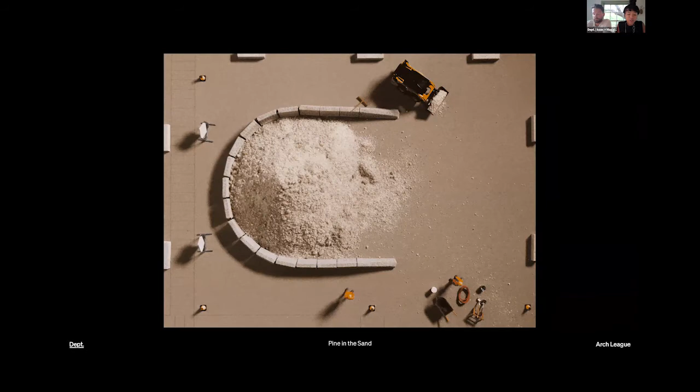This first project is called Pine in the Sand. It's a living installation located at the Wallach Garden in Cambridge, Massachusetts. Through this installation, we were interested in exploring how people would interact with and shape a landscape over time, and calling attention to the labor of maintenance and care, as well as the environmental processes of degradation, erosion, and change. Like the title, the physical contents of this installation are quite simple. A pitch pine is planted atop a 12-foot mound of sand, and concrete jersey barriers partially contain this mound in a U-shaped wall. There are also recycled granite benches opposite the mound for visitors to rest and reflect.

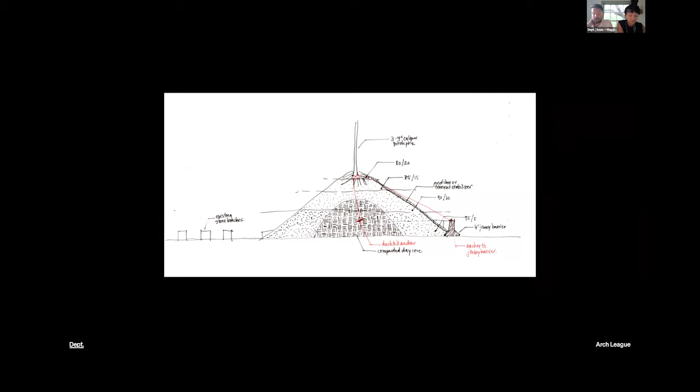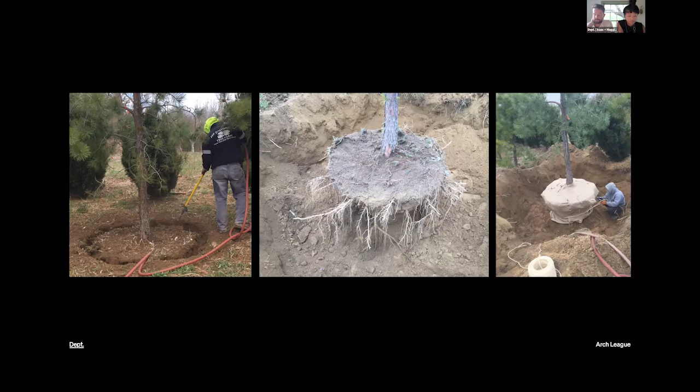Though simple on the outside, the installation depends on what cannot be easily seen. From the calibrated soil mixes that balance nutrient content of the tree and structural stability of the pile, to a locally sourced pitch pine that was extracted from the ground through a process called air spading to preserve the most roots possible, to testing and modeling the exact extent of erosion given different sand and compost combinations. Over time, rain, wind, and snow alter the appearance of the tree and the mound.

Winter turns the pile into a small snow cap, and the color of the sand changes depending on how recently it has rained. Even small mammals have moved in.

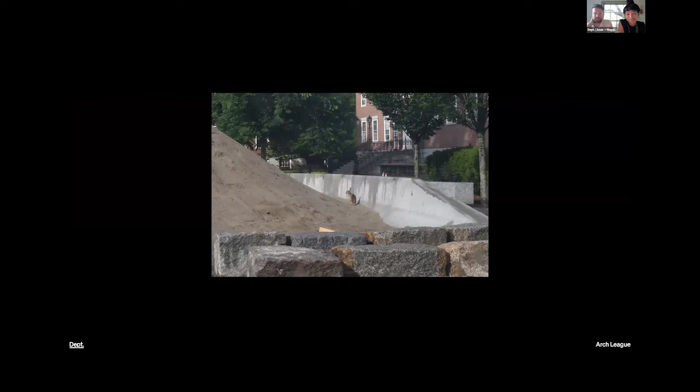The installation invites visitors to interact using brooms, rakes, or whatever they may please. They are simply asked to please take care. Visitors engage in a variety of actions, relationships, and etiquettes that bring the pile to life, from gently raking and upkeep, to rambunctious running and playing, to writing fleeting messages, and to quiet reflection.

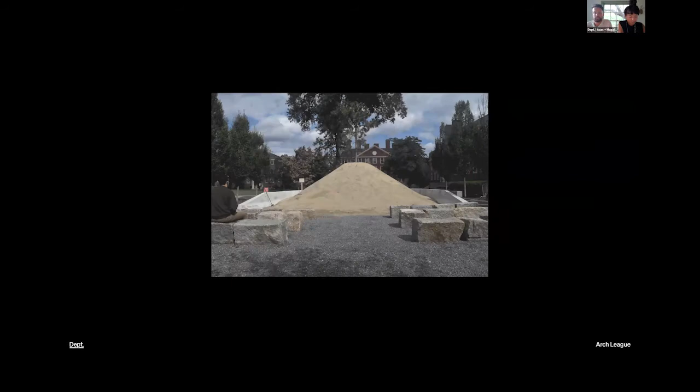The deliberately mundane elements of the installation, a tree, some sand, and jersey barriers, come together to create a space that is transformed by the social and cultural dimensions of maintenance, care, and upkeep. The pile of sand becomes a background to everyday life.

With time, visitors come to see the installation as a barometer for change, registering short-term changes in weather, as well as slower changes in seasons. But more importantly, with patience and steady observation, visitors see the installation as a monument to impermanence, a small pile that manifests the ways in which we contribute to the degradation and care of our environment.

The Good Neighbor Stormwater Park is a half-acre community park in the city of North Miami that transforms a flood-prone vacant property into a stormwater infrastructure landscape. The project was designed and built as part of the Van Alen Institute's broader initiative called Keeping Current.

The intent of the project was to reimagine the use of the city's growing number of so-called repetitive loss properties, or properties that are very prone to flooding. The driving concept of our proposal was to create a stormwater retention basin that would both prevent flooding for the surrounding neighbors, as well as provide a community open space.

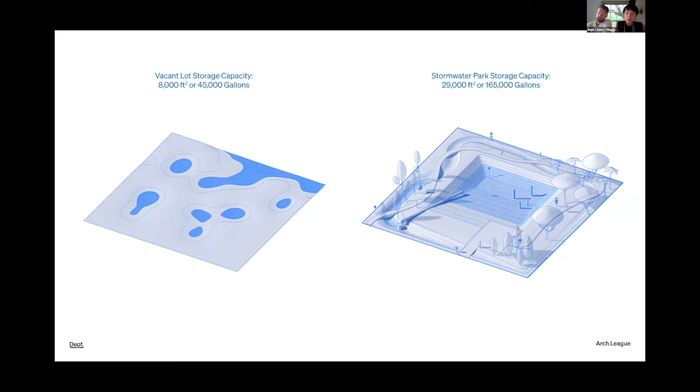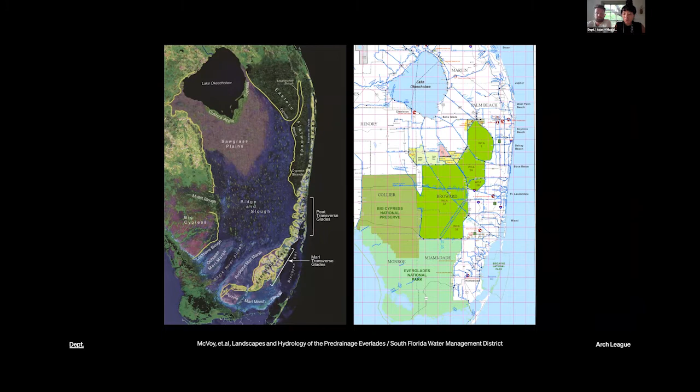Literally on top of that hydrological system, the continuous expansion of impervious surfaces such as roads, parking lots, and building roofs limit stormwater infiltration. And finally, because of the limestone geology of the South Florida region, sea level rise actually elevates the groundwater levels across the area, making flooding worse in low-lying spaces and rendering infrastructure basically outdated.

Before the Good Neighbor Stormwater Park was built, there used to be a house on the vacant lot. It was built in the 70s, and the house flooded so frequently that eventually the city offered to buy out the owner. When the owner accepted the offer, the city demolished the house and the lot lay vacant for approximately two decades.

A simple excavation on the site, which lies several miles west of Biscayne Bay and the Atlantic Ocean, reveals that the water table is only inches below grade, even on dry days.

Communicating the history that Maggie alluded to of the site and its present-day impacts, as seen in the hole, were principles that we baked into the community engagement and into the design of the park itself.

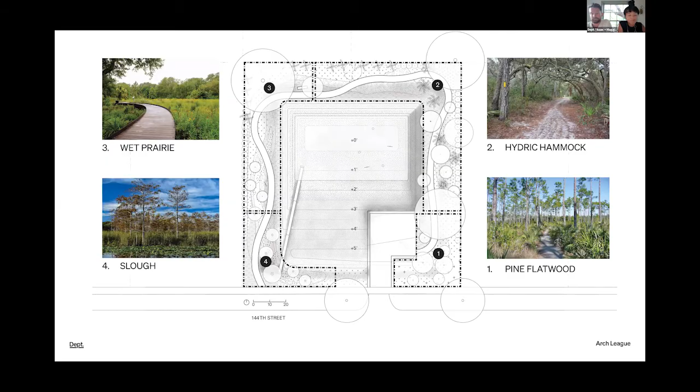In addition, there's interpretive signage about each of these plant communities, neighborhood flood hazards and risks, and the history of the site, providing context and information about the park and its function in the neighborhood.

What makes the Good Neighbor Stormwater Park unique is that it provides multiple benefits in a small footprint. It reduces local flooding, restores habitats and strengthens ecosystems, and finally, it provides a community open space that engages neighbors and residents on flood risk.

The park also serves as a model that can be adapted and replicated for future repetitive loss properties in the vulnerable region of South Florida, which we detailed in the overall vision plan and roadmap for the city of North Miami.

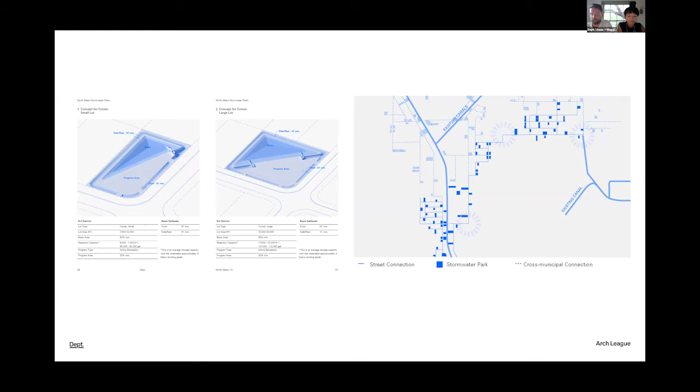In this way, the park offers an alternative form of stormwater infrastructure. Unlike other retention ponds or stormwater pipes, which are either buried or hidden from sight, the Good Neighbor Stormwater Park is a legible landscape for flooding and advocates for a small-scale, community-oriented approach to stormwater and climate adaptation.

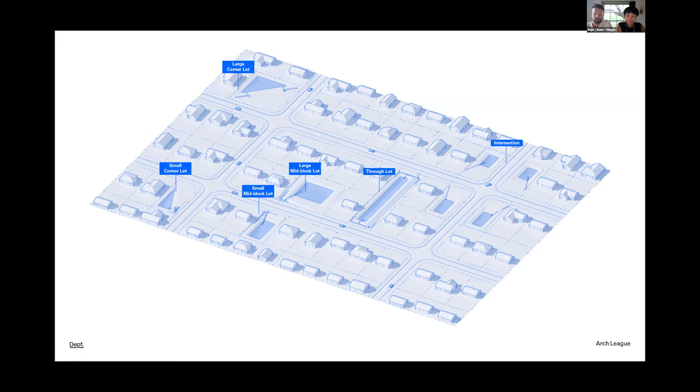The Court is a landscape and courtyard for a small hotel in North Florida that we recently completed. In this project, one of our goals was to transform a heavily compacted parking lot into a coastal scrub garden. In doing so, we worked to persuade our clients to reimagine the relationship between public and private spaces within the hotel and to push their boundaries of typical landscape and maintenance practices.

In this project, we were interested in recreating the region's endemic landscape while also accommodating the programmatic needs of the hotel. Last week, there was a discussion among the panelists about the relationship between the designer or architect and the client.

In this project, in our practice, we have a lot of typical developer, commercial, and institutional clients. But in that work, we are always collaborating with them as well as contractors and others to really demonstrate how our work, in this case landscape, is not mere dressing on top of the ground, but is really a performative, infrastructural, and culturally significant aspect of the project.

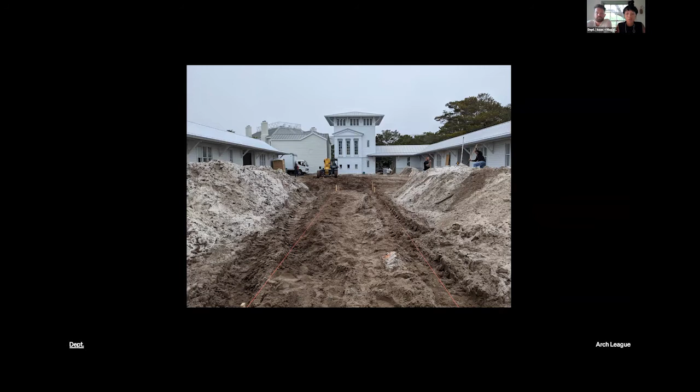Functionally speaking, the client wanted to separate the central courtyard from the private units of the hotel, and they initially suggested that we build a fence or physical partition. For us, rather than creating a sharp division between public and private, we proposed a subtle topography and strategic planting that would provide a more fluid threshold and a lush garden setting for the courtyard.

This topography is specifically modeled after the sand dunes just 500 feet south on the Gulf of Mexico from this site, and composed so that when you're sitting inside the room or laying on the bed, you feel immersed in a subtropical scrub forest, shielded by the palmettos and leaves of the live oaks. But once you stand up and look out the window, you get a glimpse just over the palmettos into the central courtyard.

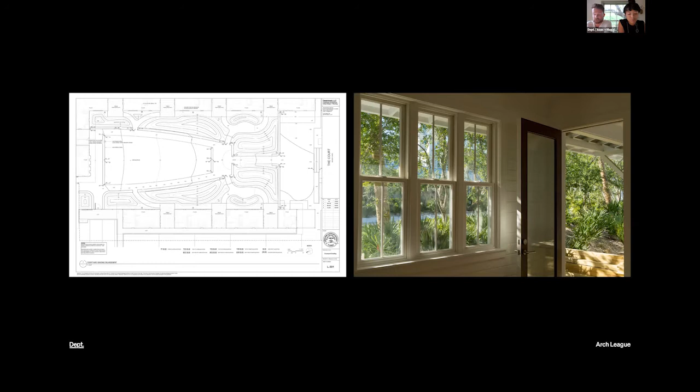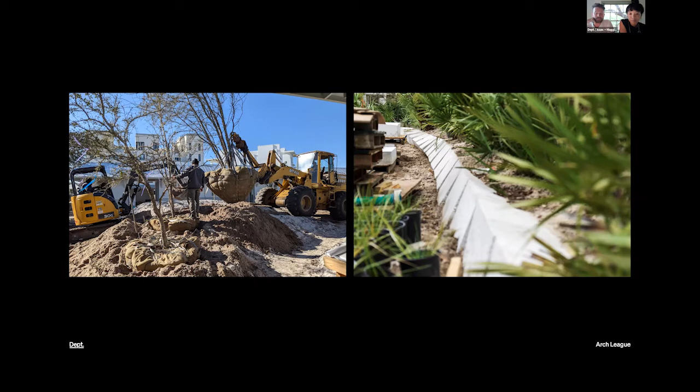In order to execute this concept, we worked with a community of collaborators, from suppliers and installers to groundskeepers and artisans. With regional tree farms, we worked to source wild-grown trees or trees that were otherwise undesirable, either because they were bent or curved or multi-stemmed. We worked with a local concrete artisan to refine and recreate a tabby concrete mixing method using shells and lime that you see on the right.

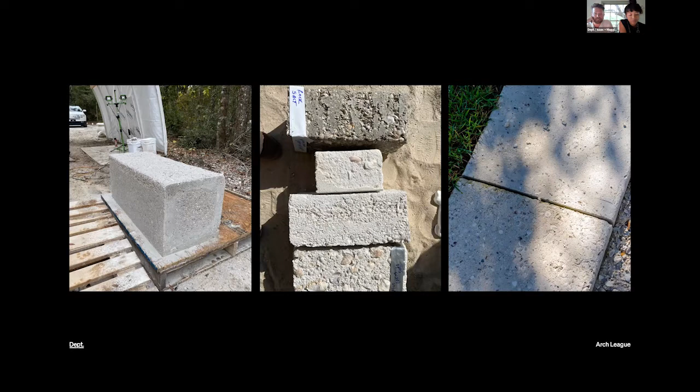Finally, we conducted on-site workshops with the client's landscape maintenance team and assembled a maintenance guide that established seasonal and long-term pruning and upkeep guidelines for the groundskeepers to work with as the landscape matures, evolves, and grows into its form over time.

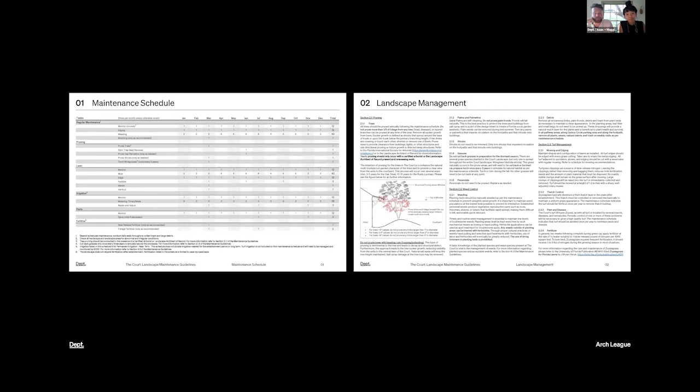Ultimately, the Court is an example of a project where we tried to push the boundaries of our clients' initial expectations and programming needs. In doing so, we aim to help our clients understand the potential of landscape to create a sense of place and cultural identity, and also, through collaborations, develop new methods of construction and making within a local economy.

This last project is an in-progress installation called Prairie Plots that critiques the classic American lawn and explores lawn alternatives. With literal roots in English landscape design and garden cities, the lawn is a symbol of our insatiable desire to control nature. Lawn care, however, has damaging effects, from water-intensive irrigation systems to harmful pesticides to the noxious emissions that lawnmowers and other lawn care tools create.

As a response to this context, and focusing on Houston's historic ecology specifically, Prairie Plots transforms a portion of Rice University's extensively maintained lawn into a vibrant coastal prairie.

So this ongoing installation is tailored around the tools that Rice Grounds already uses, specifically a 60-inch zero-turn mower. The plan is based on a simple grid of planting beds shaped by said mower. We're working with the Rice groundskeeping team to develop a reduced alternative mowing schedule that reduces both emissions and labor.

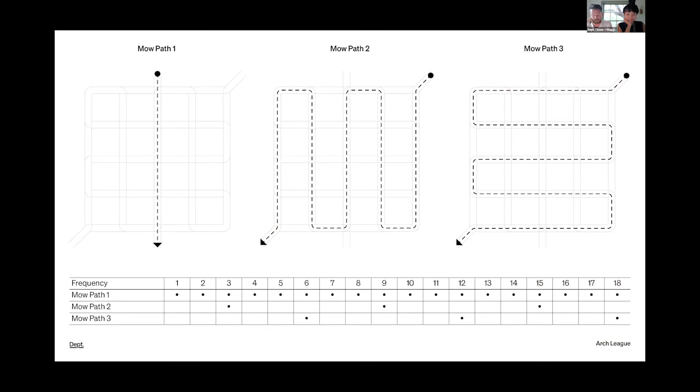The resulting landscape is a prairie garden that allows visitors to envision an alternative to the ubiquitous and homogeneous green lawn.

Prairie Plots, in its essence, is a performative landscape that improves soil health and groundwater infiltration. The Coastal Prairie Conservancy, a regional nonprofit in Houston, estimates that 1 acre of coastal prairie, with its extensive root system, can store up to 400,000 gallons of water. This would significantly mitigate urban flooding, which is a regular nuisance in Houston.

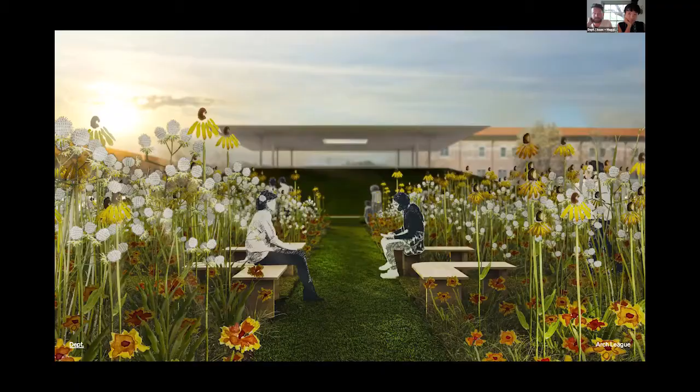So while the installation at Rice is quite small, the potential territory for change is vast. As a living and growing installation, Prairie Plots presents an alternative for the city's sprawling landscape of suburban lawns.

Finally, before we wrap up, we wanted to build off of our Prairie Plots project for this next project called Remnant Nursery, our installation for the Arch League Prize. We worked with photographer Jake Eshelman to document the process. This project proposes a model of collectivity and exchange in the form of a temporary nursery.

In the Houston metropolitan area, rare vestiges of the region's once vast Gulf Coast prairie remain. While protecting and conserving these landscapes is important and critical to conservationists and preservationists, Remnant Nursery instead addresses the reality of rapid urbanization and proposes a messier way of understanding urban ecology.

Through the installation, we rescued plants from a threatened prairie on the edge of the city that was slated for development into a gas station and parking lot, and instead distributed them to Houston's residents. The Remnant Nursery invited community members to facilitate a process of plant migration, where they can extend the life of these unique species within their own spaces, in gardens, right-of-ways, or other urban landscapes.

So we'll leave it there, but you can check out the full installation on the Arch League website.

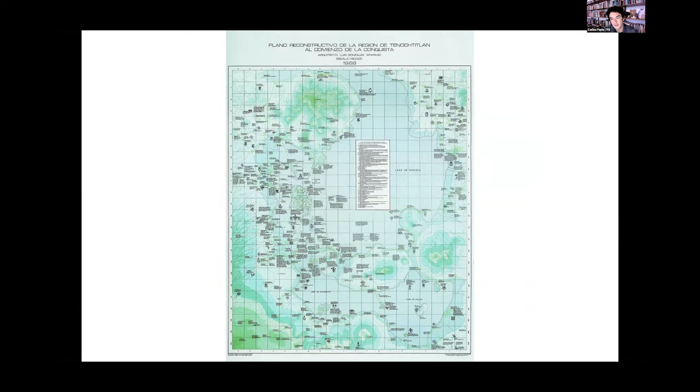Mexico City, Tenochtitlan, 500 years ago was a large system of lakes, islands, and stone paths crossing the waters. The city we came from, after centuries of ecocide, preserves the traces of the ancient city. This is like a trace, you can see both cities in one.

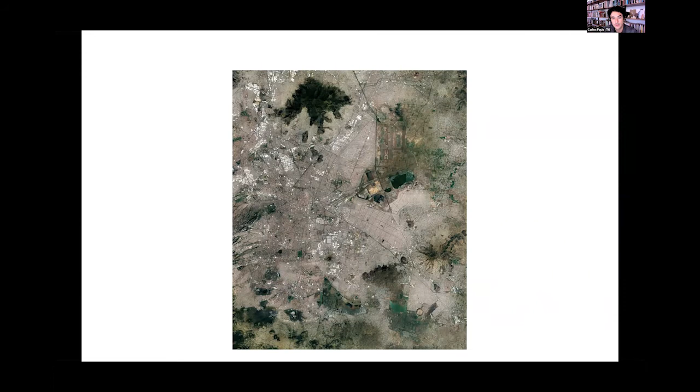We truly believe that the solution to the current environmental and social crisis has to come from the core, from the inside. Of course, fleeing elsewhere not only does not solve the problem, but perhaps increases it.

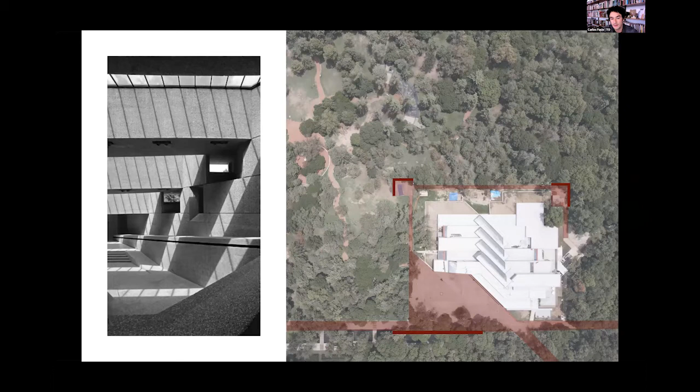So this is the Tamayo Museum. It's an emblematic work, an incredible piece by Abraham Zabludovsky and Teodoro González de León. Here in red, you can see the original exteriors.

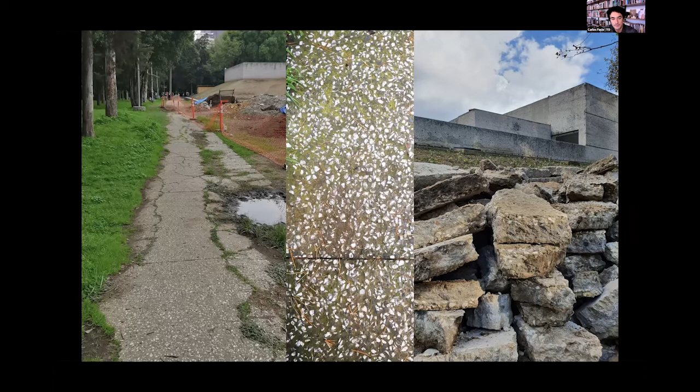And when they invited us for the contest, this was the state of the floors, and they were doing work to remake them. As the budget was very, very small, like $5,000, we thought a strategy could be to float the original floor, to convert the memory into a vegetal pergola, paying only for labor.

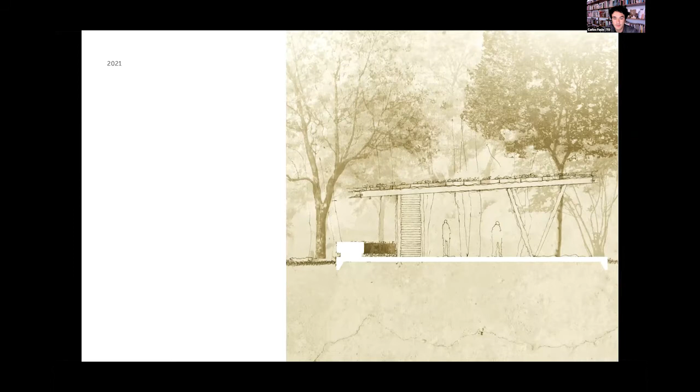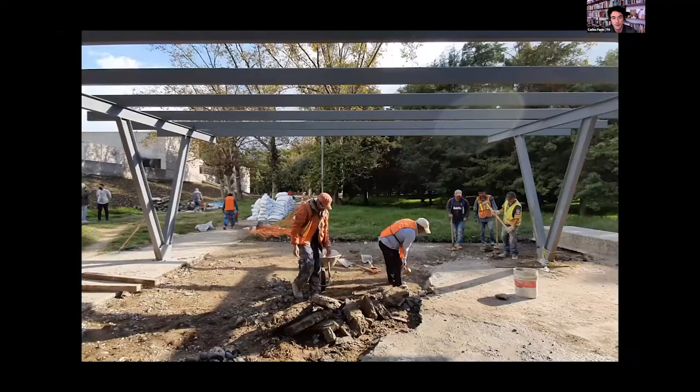This is a sketch made by Hugo Sanchez, a friend of ours and a great landscape designer. Over the years, the idea was that the plants could be a testimony to the passage of time. And the work started.

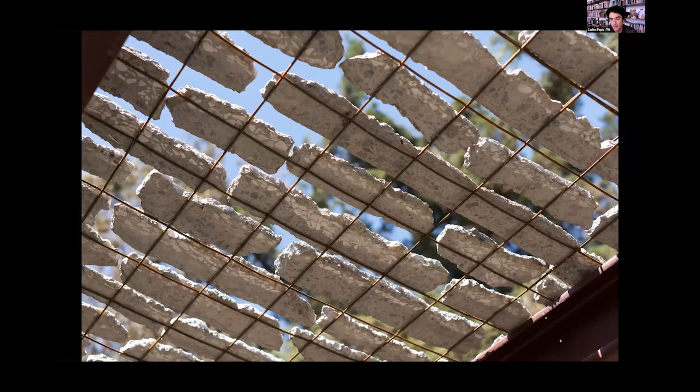We sliced the rubble, turning it into slabs. This piece of stone became like tiles in a pergola, and some parts became planters for soil and vegetation. Here you can see the original marble stones and a material that was meant to be rubbish in some dump, converted into a temporary testimony of the museum's memory.

In the end, we really hope that they feel pity for the plants and never move the pavilion. Fingers crossed.

To delve further into this reflection about the crisis of Mexico City, as you can see, the green areas of the city are disappearing around the city, and we have to turn inwards. So how can we recycle our own architecture?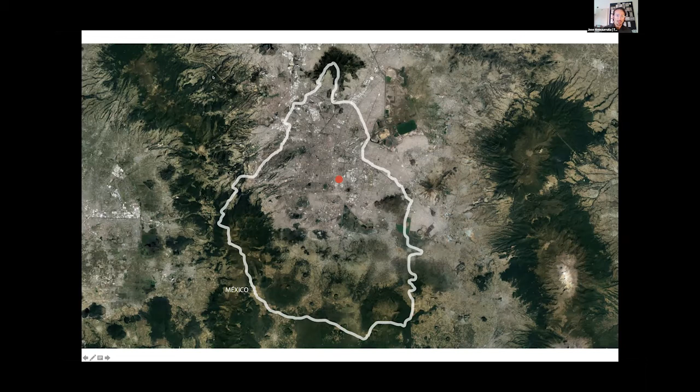This plot is in Iztapalapa, an area of town that received a lot of the rubble from the 1985 earthquake. From that rubble, many parts of Iztapalapa were not proper for building houses, but eventually the community organized itself to regulate the land and improve the quality of the soil in order to build.

Here it was a non-governmental organization that organized people to improve the quality of the soil and regulate the land. That organization is called Frente Popular Francisco Villa, and it was them who actually donated to Kithara Foundation a piece of land for the music school.

Since this part of town has very high levels of violence and also great social issues such as water scarcity, it was important to create a project that could promote new social life. So together with our friends from Kithara Project, we designed a project for the community and with the community.

This was the plot they gave us for the project. It's 20 by 20 feet, which in meters is only like 7 by 7 meters. So it's very small, and it's next to the library and the cultural hall of the community.

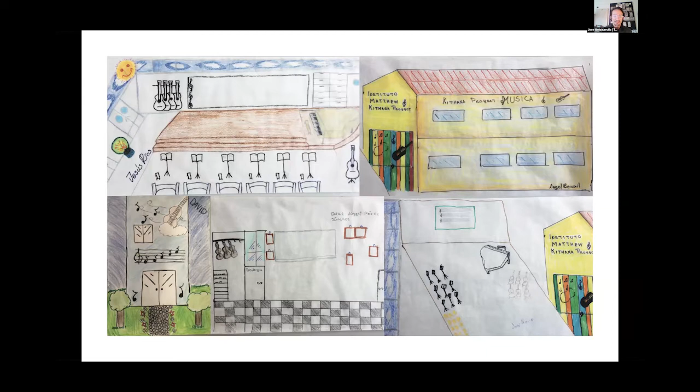One of the first things we made was a workshop with guitar students, where we asked them how their ideal music school would be. Some of them were visionary and proposed a 2-story school. Some of them proposed a garden. Some of them proposed very functional qualities, like having a storing room, hanging walls, and a choir space.

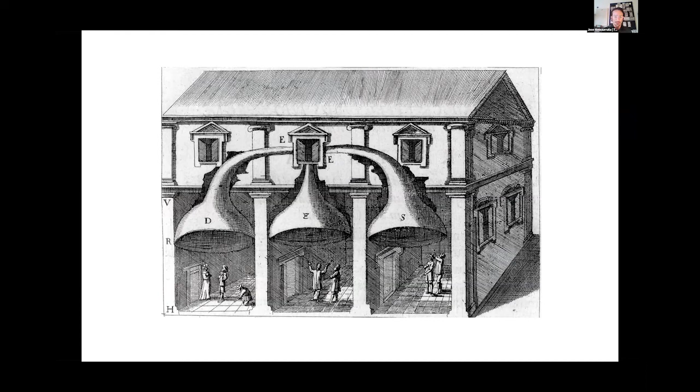Of course we listened to these ideas and poured them into the project. We started to think about how this building should behave, and we thought it had to be an instrument itself, like a musical instrument that emanates sounds outward, like this Renaissance drawing. We also thought that the building had to have an acoustic quality that would balance between the reverberation of sound and the absorption of sound with the geometry and the materials.

We thought of a historical reference here in Mexico, which are the open-air chapels, which in the 16th century were built so that religious ceremonies could happen outdoors. The built structure would only be a cover for the religious ceremony, but all the people would gather outside because of the climate and the traditions, so many events could happen outside. So we thought the project had to live towards the streets.

These are some of the sketches about not losing the geographical references and about how to make two classrooms: one upstairs with the views and an isoptic quality for the musician, and one downstairs so that the classroom would open to the street.

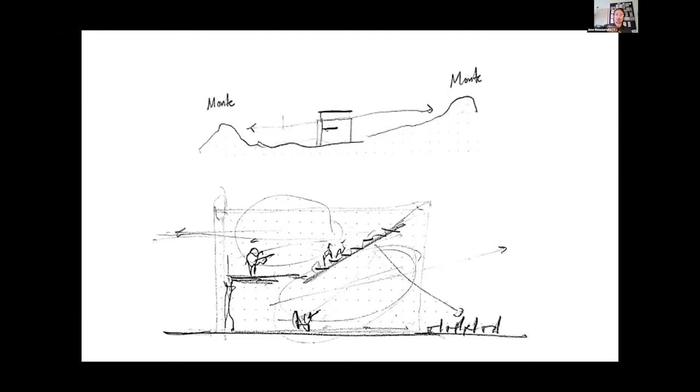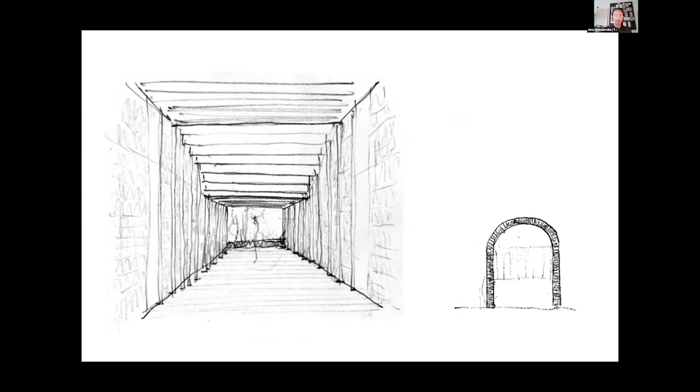Later on, we further investigated geometry and how a vault could actually help the sound to keep inside, and we made research about the materials.

The plan is very simple. It's just a classroom and a storing room with a bathroom and a more private and safe box, like a safe space. These are our paper models.

This whole project is actually built based on donations coming from the United States and Mexico and from many people. It's a communal effort, so the spirit of the project is very simple. Also, the material that the walls are built with was donated by the community.

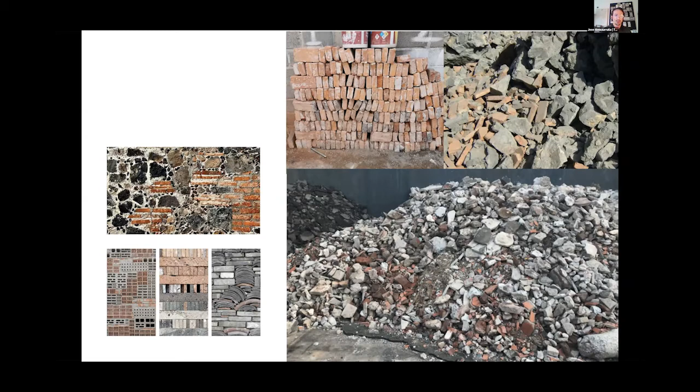Some of the material was donated, some of it was recycled. We were at the time working on remodeling a house in the south of the city, so we took some of the material from that house here, and we started to test how to make this texture of the walls and to reinterpret the idea of a wall made of recycled material.

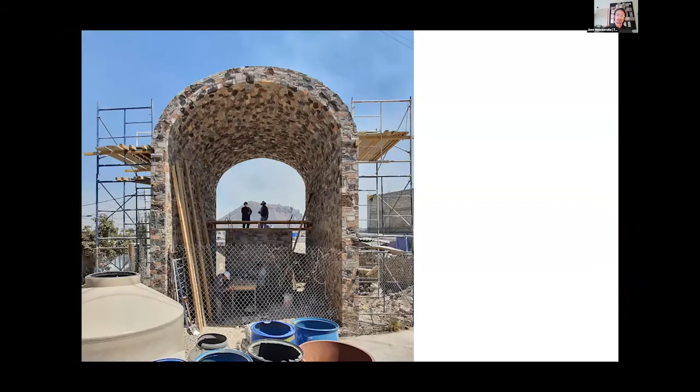Also with the wood, we used recycled cimbra framework for the construction. The same wood we used for making the vault was also used for making the stand for the upper stair classroom. These are images taken recently, only 3 months ago.

Right now we're finishing the kiosk, the musical kiosk. So more than an enclosed school, it's a public space. We had a symbolic opening ceremony in March, and we're already seeing how the space is being used. We're very happy with the life it's acquiring on its own.

Now we will talk about the House of Music in Nacajuca.

This is a project we did with our Colectivo C733. Nacajuca is a town in the state of Tabasco, in the southeast of our country. In the beginning, the construction had clay tiles and porches, which work very well for the climate of the region. This is like the whole view of the town, and the project was part of one of the federal government's urban improvement programs.

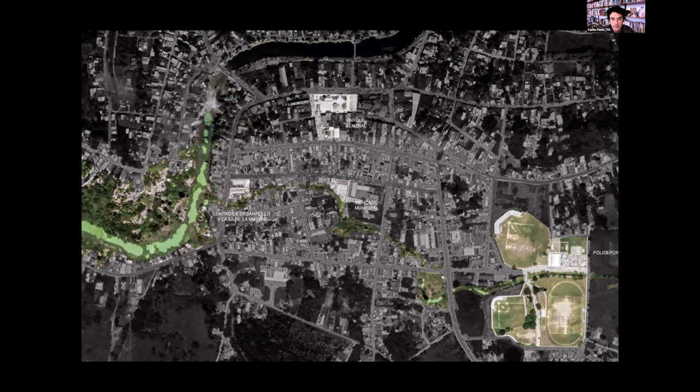We collaborated with two other studios, MMX, who made the plaza, and Enrique Lastra, who made the market. And nearby is Comalcalco, one of the few archaeological sites with pyramids made of brick, a material used for centuries. We always start from seeing this kind of reference, because architecture is never a blank canvas. On the contrary, it is sometimes a very colorful one.

Most of the population of Nacajuca are Mayans, Chontal Mayans. The Mayans didn't disappear. Actually, they do great parties. They make these carnival parties, and they have a lot of tradition in music and festivities.

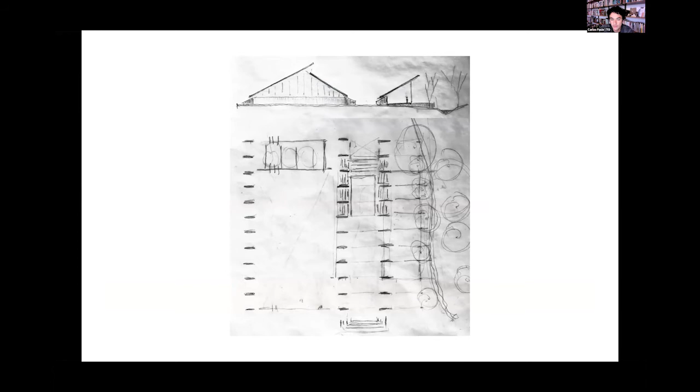This was already a community center and a school of music, but needed some improvements. It also had a wall to hide the stream, which the whole town uses to throw drainage waters and as a garbage dump. So it seemed to us that the best thing was to tear down that wall, and that the new School of Music and the whole building turned to the river.

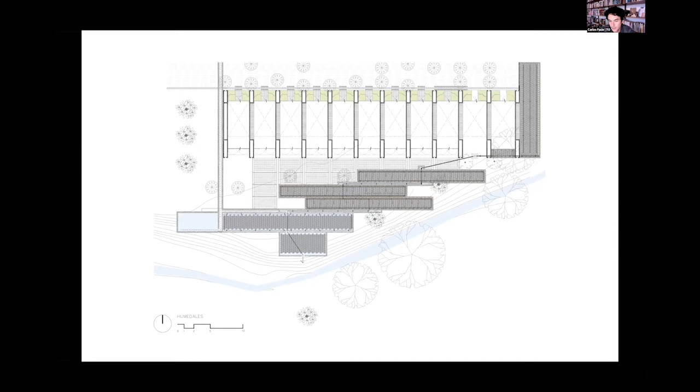For us, this was the most important thing. We designed this water treatment system. In addition to rainwater harvesting using the roofs, the waste water from the toilets goes through this treatment system that ends up in a series of wetlands, releasing clean water into the stream. So we are very happy, because this is the very first building in town to do that.

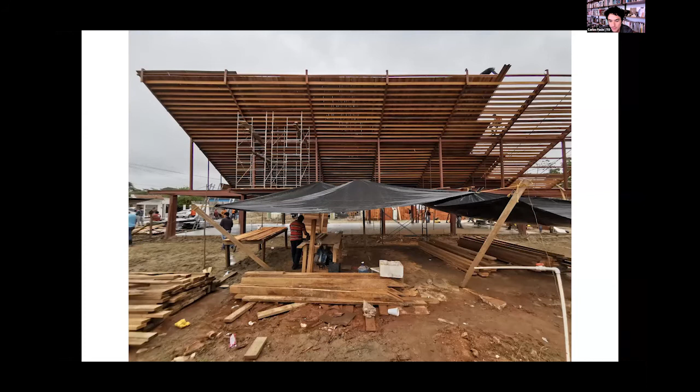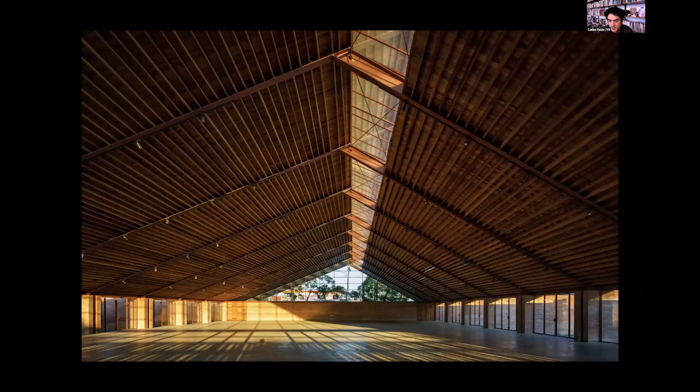We hope that since it's a public meeting point, it will serve as an example for future generations. We also use coconut palm wood, very abundant, and it's a renewable resource. It's very cheap and works well with the climate, provides warmth and freshness.

Here you can see that instead of glass, we use mesh and celosias, this wall with holes, so that the wind could flow and avoid the use of air conditioning. In some years, these tiny trees will provide good shade, we hope. The good thing is that it's already working as a school.

To finalize our presentation, we will briefly talk about the new lives of this pavilion we made at Zócalo. It's an ongoing project. Originally this pavilion was made for the International Culture Fair. And when it happened, it was just after the earthquake of 2017.

Since this was an important public investment, we thought it was important that every part of this structure could, after the fair, be donated elsewhere. So all the logic behind the design and the construction was so that every piece of the project could be moved towards other areas of the country that needed a roof, for refugees or whatever kind of community events.

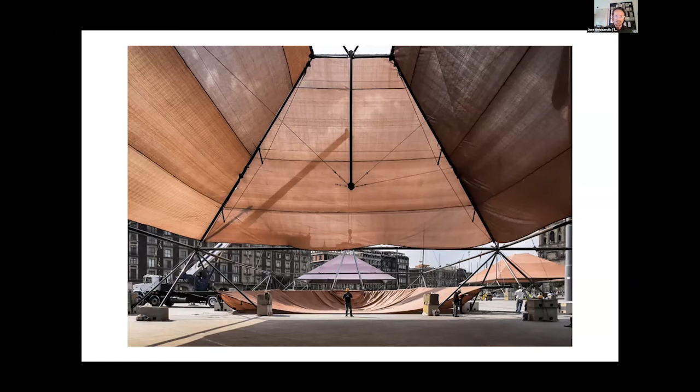These are 20 by 20 meter structures that we designed together with LabG and Eric Valdez, our partner also at Colectivo C733. And we've been working with a non-governmental organization called Piensa Sostenible to reestablish some of these structures in different places of the country.

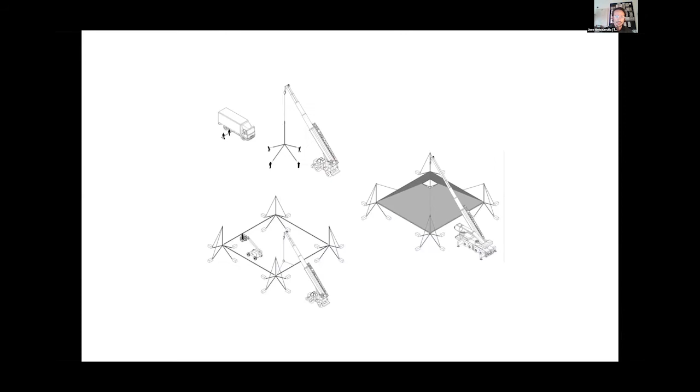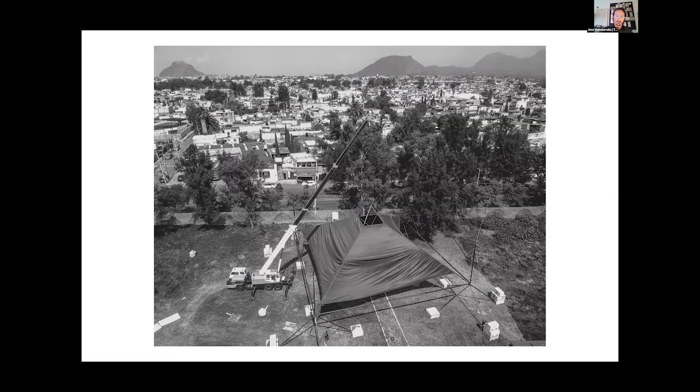So this is the logic of the movement of each canopy. Each canopy can fit into one truck, and it can be mounted in one day by a crane and a small group of people. So this was the first one we re-established and moved in the south of the city in Tláhuac, where it's already working as a cultural venue.

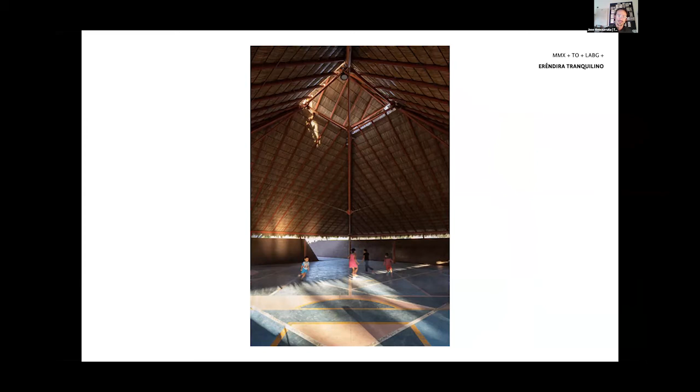This project was made by MMX with LabG and Eréndira Tranquilino. They turned one of these canopies into a kiosk, also in a public square in Nayarit, but they changed the skin and the mesh from mesh to palm tree.

Right now with Colectivo C733 we have been working on new versions of this structure that we are adapting to the climates and conditions of different parts of the country. Here it's a town in Nayarit, a city, San Blas, that also uses a lot of brick. So these are like screens of brick.

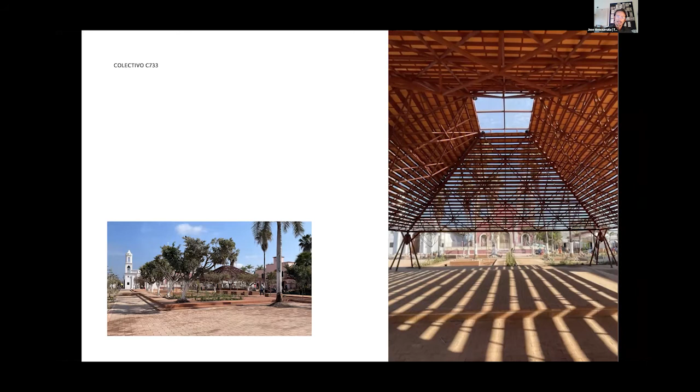And this one, the final one for us, is a meaningful one, because here this is a totally new structure. This one is not donated. However, we thought it would be interesting to take that logic of a structural, very light cover to this square.

The important thing about this project is not just the canopy itself, but that it's surrounded by a group of wetlands that also clean the water of the sewer that floods and goes across the square to the lake after a cleaning process. But for us, this is very meaningful because beforehand, the square had a kiosk.

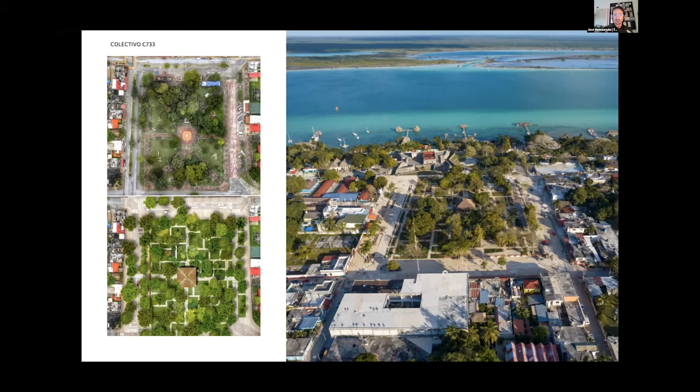They used to call it like historical, neo-historical kiosk, because it had the looks of the historical kiosks. But we talked to the people of the government and said, this has to be more like an ecological example, not a neo-historical example. Like many towns in Mexico, they try to reestablish that look that used to have in the colony, but we need to change the paradigm of that way of thinking.

So overall, and to finalize this presentation, we're gonna give you a sneak peek of our installation for the Architectural League of New York. That is a video where we explore the acoustic quality of materials, and we explore the life of materials before they turn into buildings. We are very interested in all that happens in the process of construction before it is actually made, and that we can keep in our memories through sound. It's a piece made by Diego Espinosa with us, in collaboration with David Sefami also.

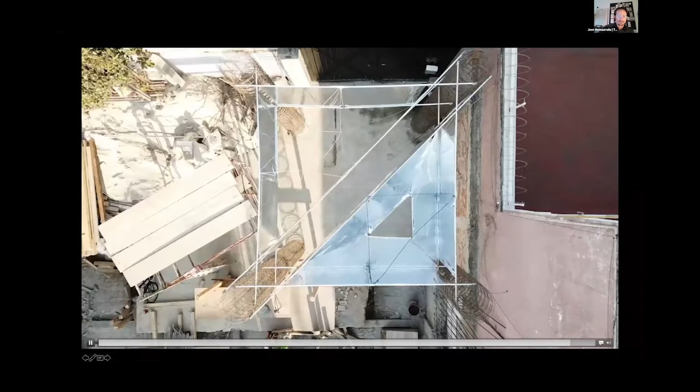Thank you very much. Very beautiful work, guys. Both of you, your studios.